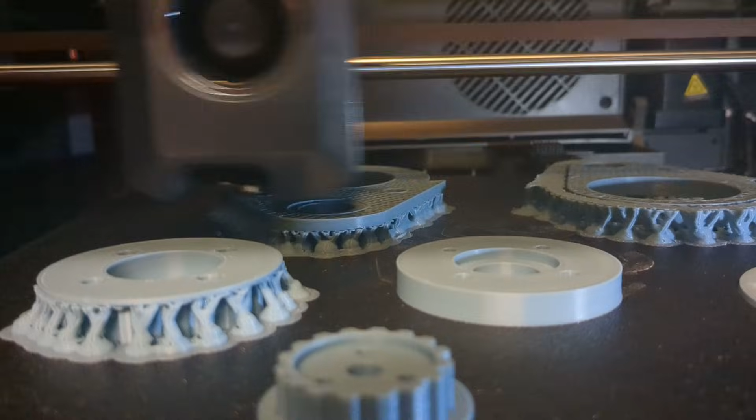Radix qualified for NHRL finals for the first time in the June 2024 qualifier. Combat robotics is a competition won by attention to detail and consistent performance. I knew this. Between June and December, I changed two small issues with my robot.

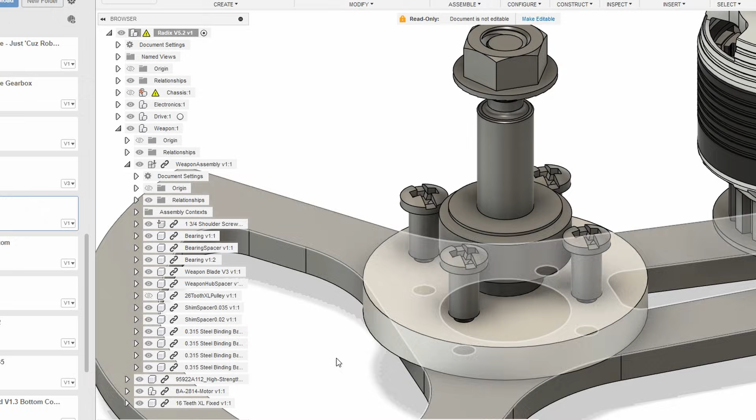First, I added a sharpened blade to my arsenal to deal with wide TPU bots like Fully Defined, Turbo Fiend, and Jelly Baby. Secondly, I added binding barrels to my weapon hub to better hold my weapon screws in. This change was made to prevent my weapon from popping off if I was hit by a big vert while upside down. These minuscule changes meant to address tiny issues were ultimately my downfall.

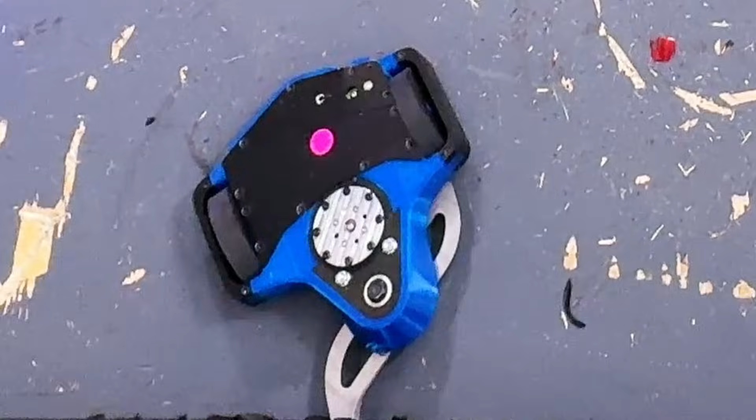For those who haven't seen, I was having a back and forth fight with Turbo Fiend in the round of 16 of finals. After the opening exchange, the fight swung my way. I had disabled one side of their drive and was bullying the mini-bot while Turbo Fiend was trying to recover. With 15 seconds left in the fight, I bounced off of Turbo Fiend, got stuck in the wall, and was counted out.

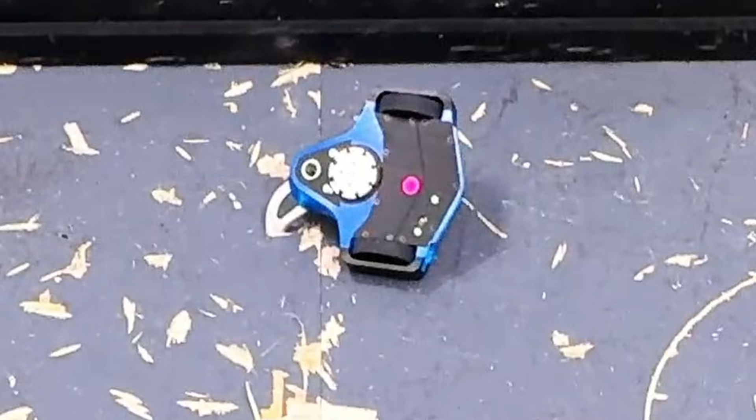Sharpened blade, maybe not such a good idea, or at least I didn't know how to use it properly. After some asking around the Discord, I've heard that I should have been spinning it faster to minimize my bite, so I wouldn't get stuck in walls or in the floor. I'm willing to try it again. However, if I lose finals again the same way, I'm never going to live that down.

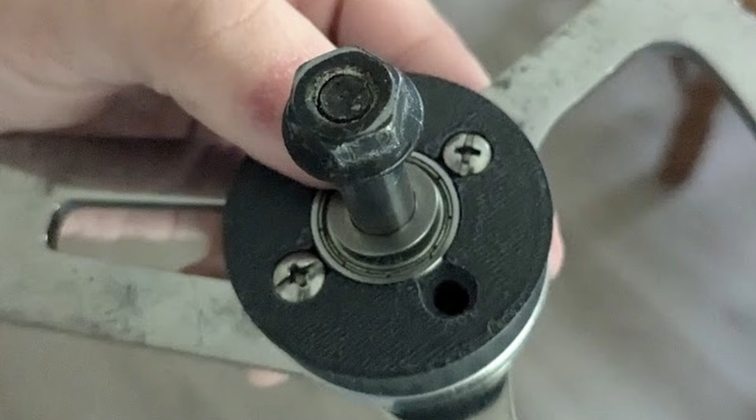Secondly, the binding barrels. To fit them, I had to increase the diameter of the holes in my weapon hub by 1.2 millimeters. I didn't even think about a change that small. Come December 2024, and the pulley cracked in every single fight.

Luckily, Radix's weapon still works with half a pulley. Not to worry, we are still flying half a ship. I never made a finals recap, so consider this it.

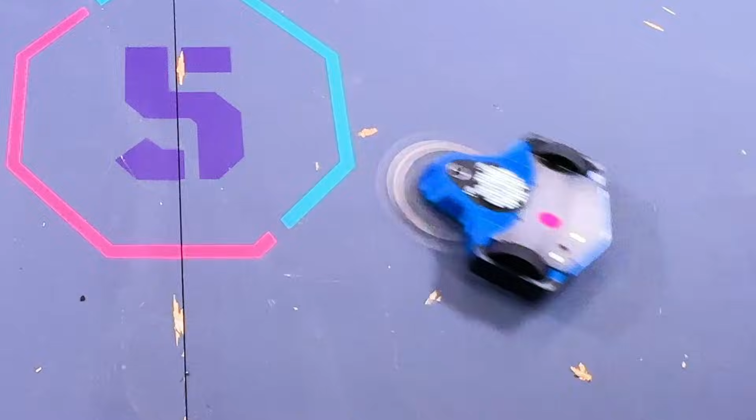The June 2025 competition has just ended, and I've qualified yet again for finals, once again by not even making it to the top 4. In fact, none of the qualifiers from this tournament had to make it to the top 4 to qualify. It was a strange tournament.

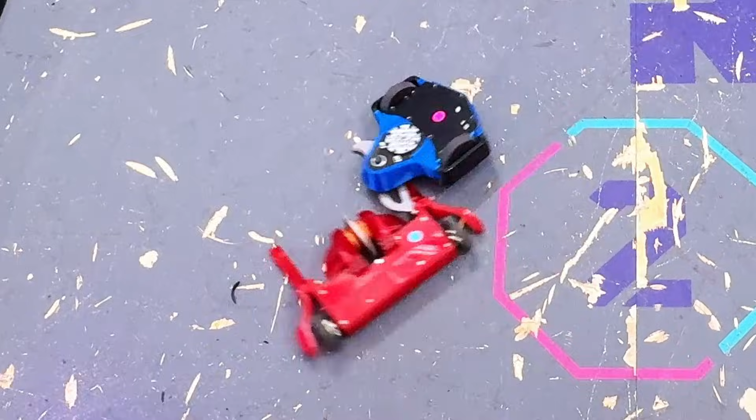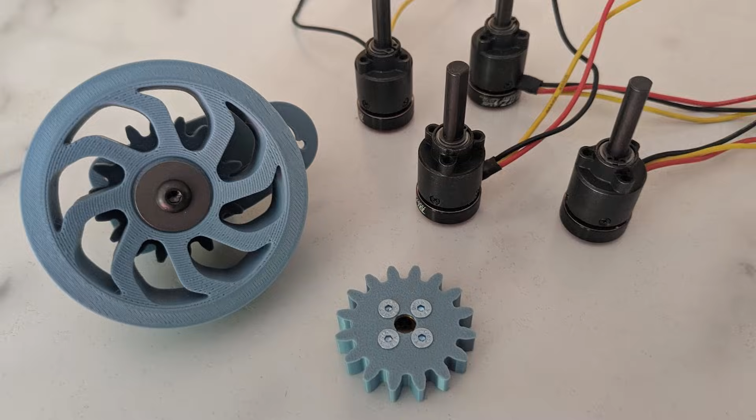Such small changes crippled my robot in finals 1 year ago, so what's my new approach? What will I be doing differently? I'm redesigning the entire robot. Why? Well, I'll answer that near the end of the video.

To understand the answer, we'll need to take a step back and look at past versions of Radix and how they got us here.

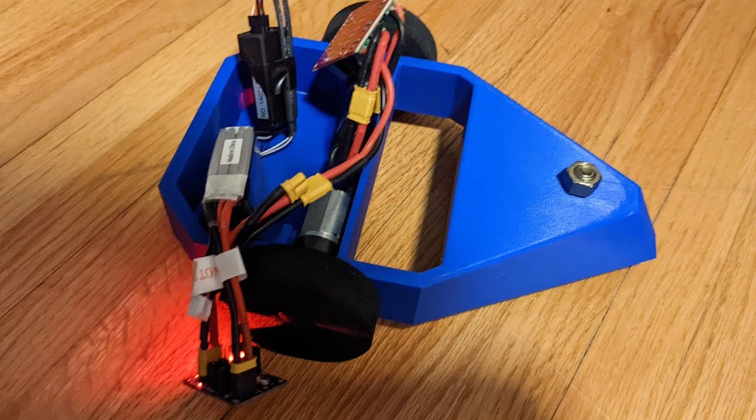And Revolver just looks lost there, Kyle. Yeah, really. The weapon could be down on Radix. Might be, yeah. That was a very loud weapon that we're not really hearing any of right now.

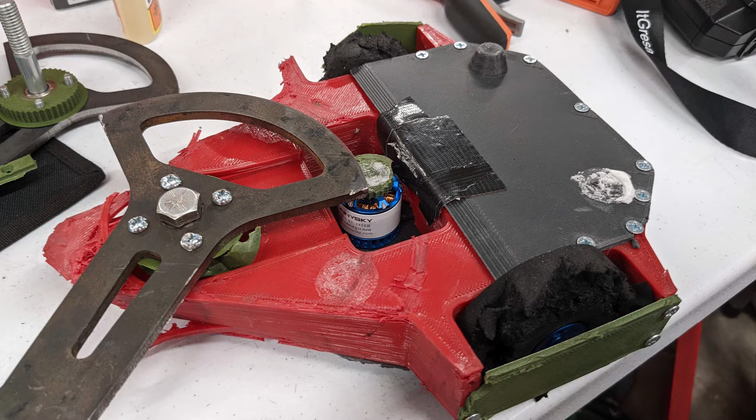The spin-up on Radix sounded scary, but that's because I was using a motor that gave me a theoretical tip speed of 426 miles per hour. However, all the weapon could do was spin. Impacts led to the loss of my belt, the loss of pulleys, a damaged shaft, not to mention that my foam tires made the robot almost impossible to control. It wasn't a bad outing. I went 2-2 in my first tournament with the bot.

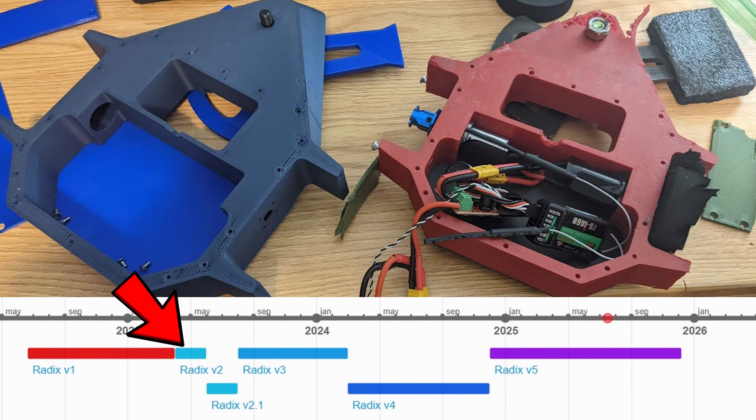Radix version 2 had a much taller frame, with the height being used to separate the weapon from the frame. I also used a stiffer TPU from Amazon to help keep the weapon in place. The actual hardware on the weapon changed too. I switched from a bolt from Lowe's to alloy steel, and from needle roller bearings to ball bearings that you'd find in a skateboard.

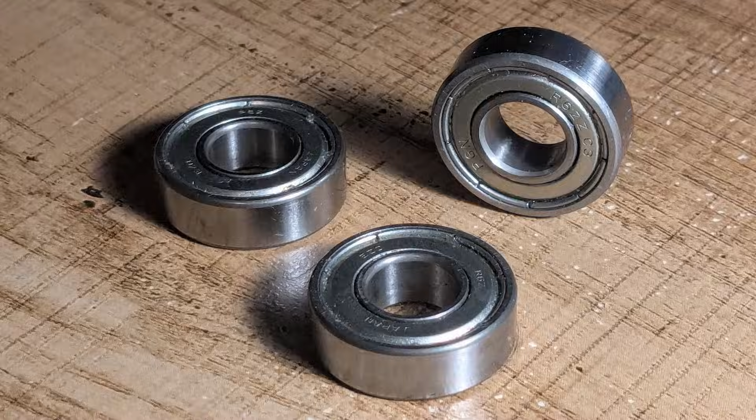This was all accompanied by a larger blade for the bot, now with a 7.5 inch diameter. This bot fought at Extreme STEM in Ohio. Oh, and Radix is blue now.

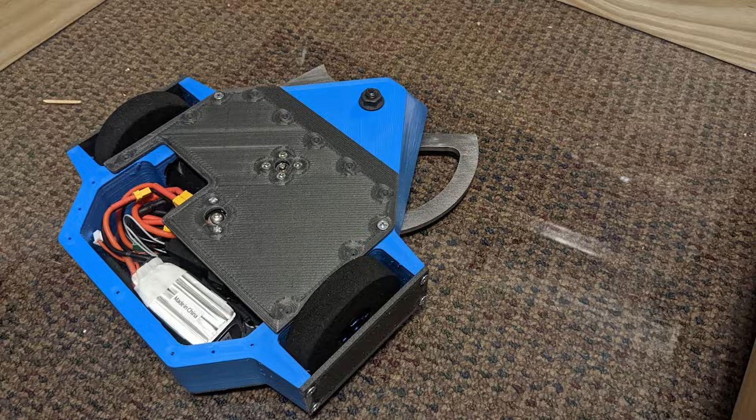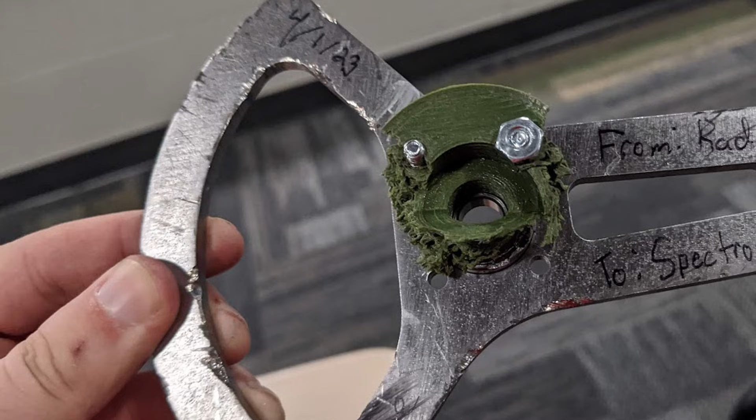That seems important. After getting bodied by Owen's bot Spectroscope twice, I learned a couple new lessons. The weapon still failed, I had just moved the failure point. Now that the weapon stayed mechanically intact, the ESC was blowing up after every couple spin-ups. Even with those limited hits across only 3 fights, the weapon made from SendCutSend AR500 was so badly damaged,

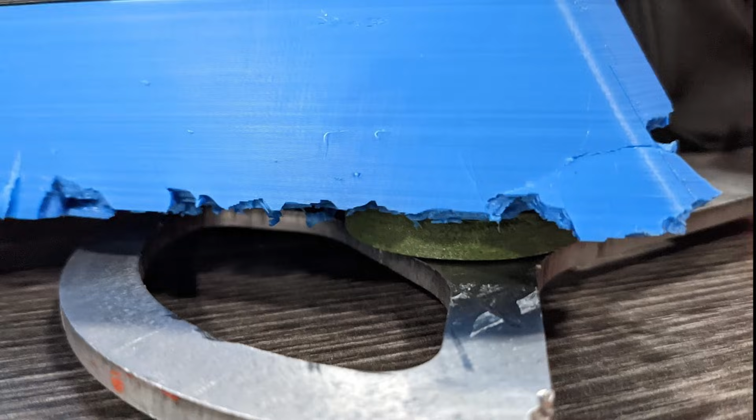I gave it away to Owen as a trophy after the tournament. The new TPU also just wasn't it, it provided about as much protection as a wet paper towel. At Extreme, I went 1-2 and took third.

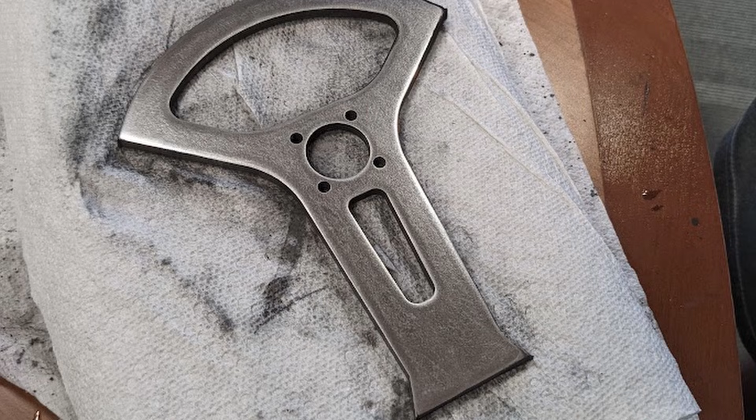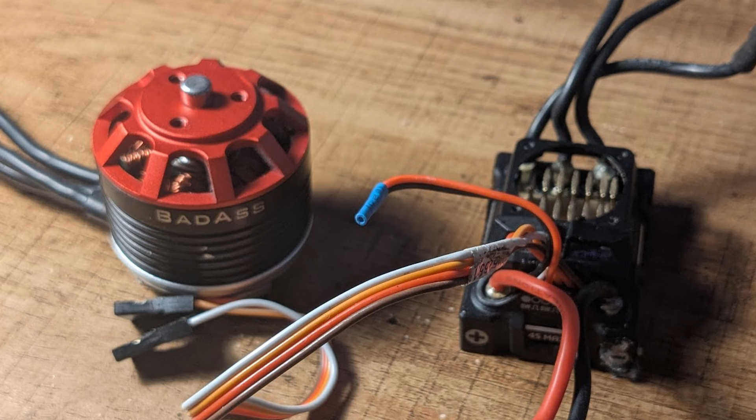Going into the following summer, I showed up at Owen's house and got my new AR600 blades, my mangled blade still hanging on his wall. I ended up settling on a much bigger weapon motor, the Badass 2814, powered by the Castle Creations Micro Mamba X2. To improve my control, I coated the wheels with rubber cement and latex.

Thanks, Calvin. What followed was the worst performance for Radix to date.

To give a short list of things that went wrong: the heavier motor warped the 3D printed top plate, being invertible isn't a strength if the other robot is short, I hurt Bart's face, and the weapon could still hit the pulley. With the electronic issues fixed, the failure point moved back to my pulleys, where it was originally. The tournament result: 1-2.

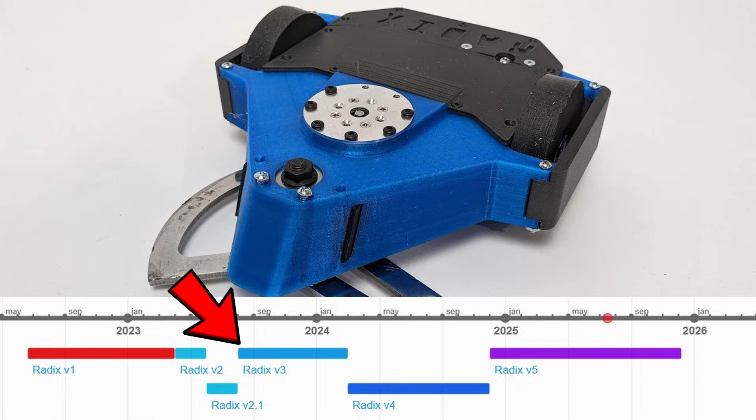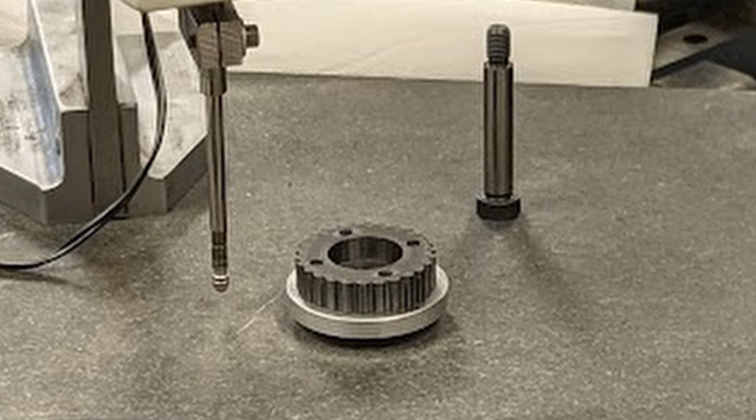This year, there were 2 summer NHRLs, which meant I could upgrade the bot and return to fight before the semester started. Carbon fiber plates were added to stiffen the front end of the robot. The first machined parts were introduced to Radix as well: an aluminum plate to hold the weapon motor and an aluminum brace to mount the weapon. Radix version 3 was born.

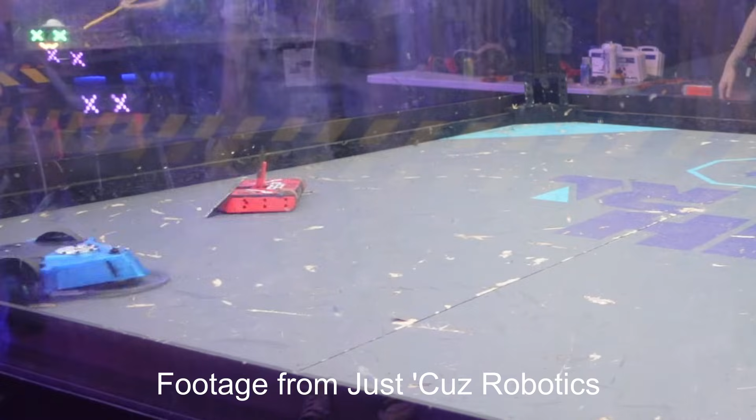My August tournament was a lot of fun. I got to fight NHRL legends Evan Arias with Shred It Bro and Seth Schaefer with SSP, who printed the first Radix frame a year prior. However, my performance wasn't much better. I went 2-2. That brings us to 6-8 total if you're keeping track.

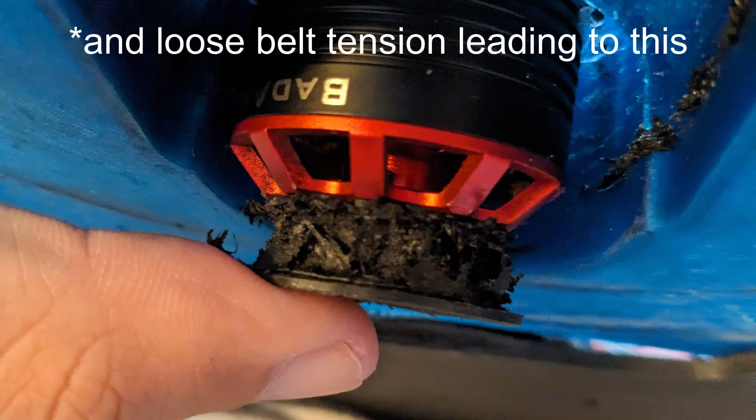The culprit? My flexing frame once again. I also had issues with my drive cutting out randomly in the Shred It Bro and SSP fight.

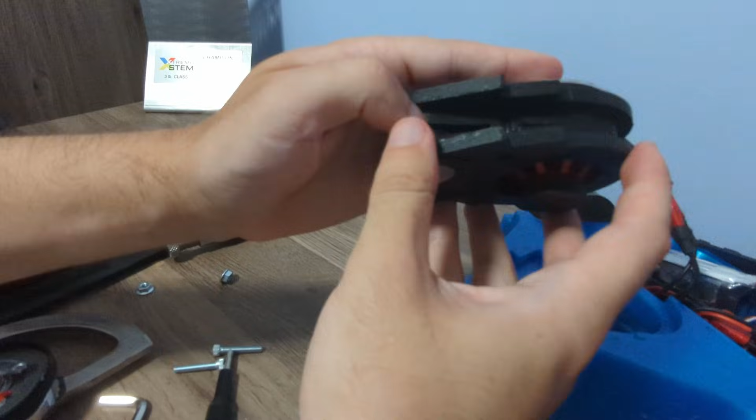Determined to fix the frame flexing issue, I printed a glass-filled nylon part meant to clamp into my frame, which would support both the weapon and weapon motor. When the weapon flexed, the motor would be forced to flex with it, moving out of the way on big hits. I have an entire video on just this part if you're interested.

I also replaced my drive motors with geckos from Seth's store, Team Just Cuz Robotics. This is the second time I've purchased parts from someone I've lost to, immediately after losing to them too.

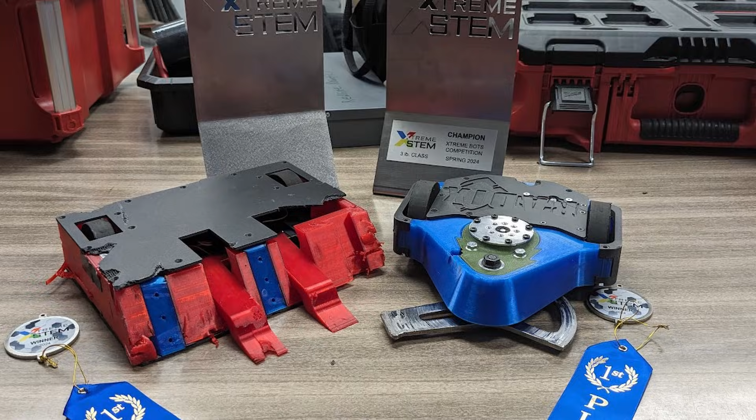Xtreme this year told a different story, not of the old, unreliable Radix, but of a new, durable one. I went 5-0, winning this tournament.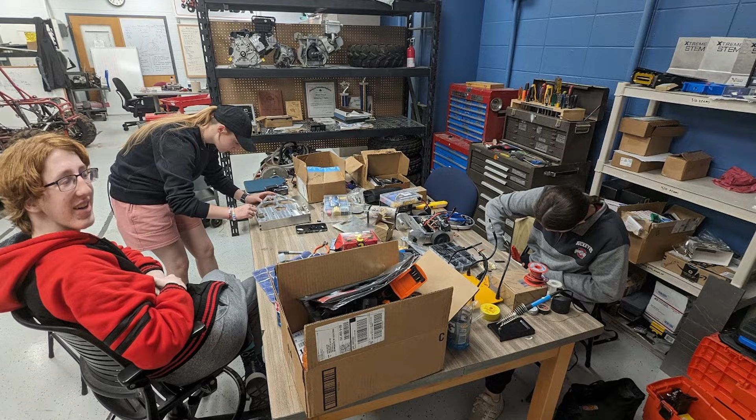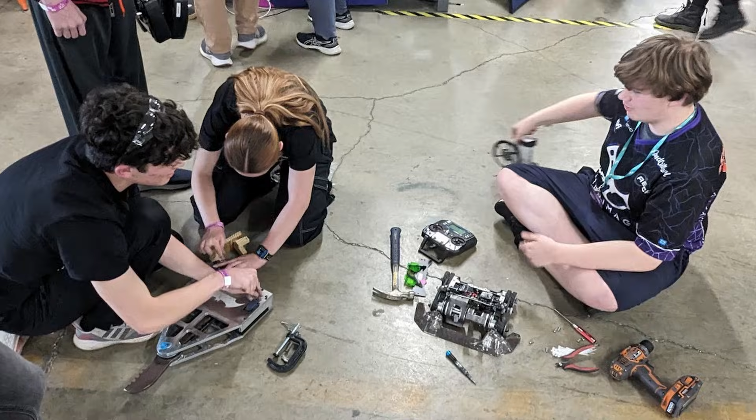I was hyped for NHRL, having finally a half-decent bot to show Radix version 4 could deliver a punch and take one too. I made my way over to Norwalk from Ohio that spring, leading the Combat Robotics group from the University of Dayton. I was competing with Radix and the 12-pound drum spinner Radon, which ended up getting maximized. The team also brought Gotham, a 12-pound horizontal, and Raise the Roof, a 3-pound dual lifter.

Radix's April 2024 performance could be labeled as alright. I showed the devastating power of my weapon against Ace and Fifan, but my lack of skill as a driver cost me against Half-Life. To be fair, that bot is a nightmare for horizontal spinners.

I decided to go back in June to give it one more shot. I spent the summer practicing my driving, but made no changes to the bot. Oh, and I also used all that time to write up a strategy document on every single 3-pound robot that registered for the tournament.

I had a little bit too much time on my hands. This was the money tournament.

I made it to the quarterfinals and qualified for finals through what I can only describe as an act of God. Normally only the top 4 qualify, but if a top 4 bot has already qualified, the next highest rank gets it. There was an insane qualification chain.

I was eliminated by Jelly Baby in much the same way I lost to Half-Life, another close judge's decision. This time my weapon motor did die at the end, but it was because I pushed it too hard and used it to escape pins.

I was in finals. Any changes I made now would be minor, and I just wanted to close some gaps in the robot's performance. For finals, I debuted version 5.

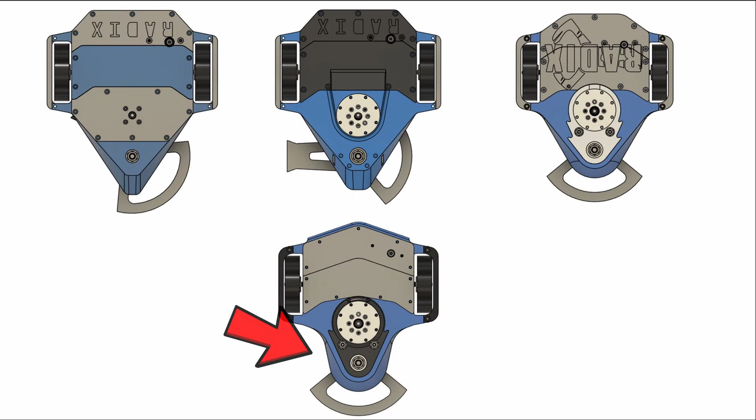I gave it a new name mostly because of its distinct profile, featuring a skinnier nose than past versions of the bot. I also made the changes mentioned in the introduction of this video, the binding barrels and the sharp blade, which both ended up not being good changes.

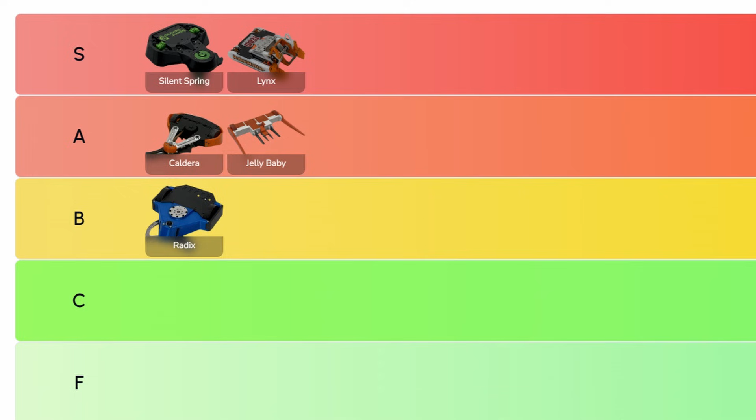I went 2-1 at finals, but one of those wins was a forfeit from Clyde. I was happy, but Radix still feels B tier, with A tier bots being tournament winners and S tier bots being Golden Brett contenders. I wanted to push into the next tier, but still had an undamaged Radix from December.

I signed up with the exact same robot for June 2025 and got another deep run going. If the new Radix is anything, it's consistent.

I went out in the same round I did a year prior, losing to Caldera in what is now my favorite match of all time. It was back and forth until it wasn't. My inferior bot simply gave out against the number 1 rank, and everything failed at once.

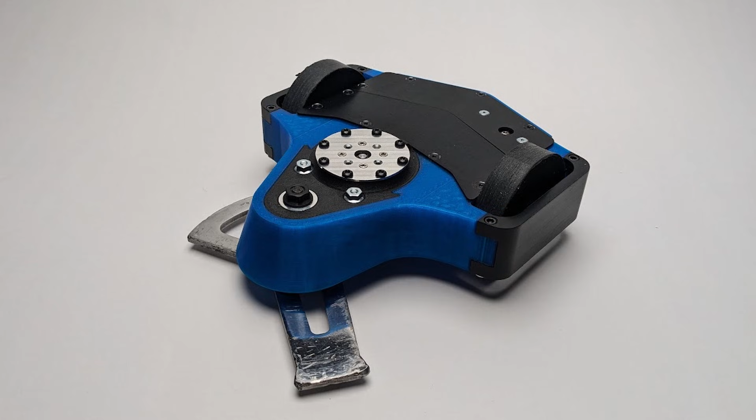The bot was totaled, and it was also my last copy of that version of Radix. I had two options. Option 1, costing about $500, rebuild Radix for finals.

Option 2, carry out the largest redesign ever on Radix, and build that version. This would cost about $1,500. I chose option 2, and it wasn't even that hard a decision.

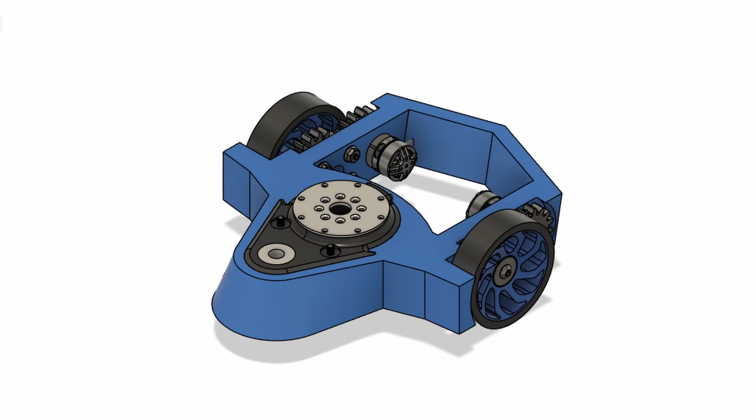Here's why. I'm stealing this analogy from a YouTuber named Technoblade. There was a math test called the American Math Contest, given to students in the country with a large scholarship award for the best. It was one of those tests where you'd get points for getting questions right, nothing for leaving blanks, but you'd lose points for getting questions wrong.

It was a setup meant to discourage guessing because on average you'd lose points. The strategy he suggests? Guess. Guess on everything. The best scores are the only ones who get a scholarship anyway. You need an amazing score, not just an average one. Even if you need to guess on everything to give yourself the slimmest chance of finishing at the top, do it. You'll probably do worse, but who cares? There's no scholarship for average.

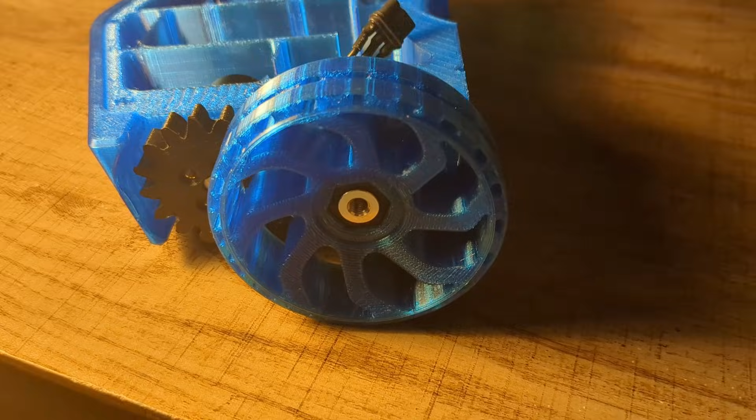The next version of Radix, called Radix NXT, uses light and powerful brushless motors with indirect gear drive. The bot is shorter, more compact, and easier to control. If the previous versions of Radix were meant to tank hits, this one's meant to kill.

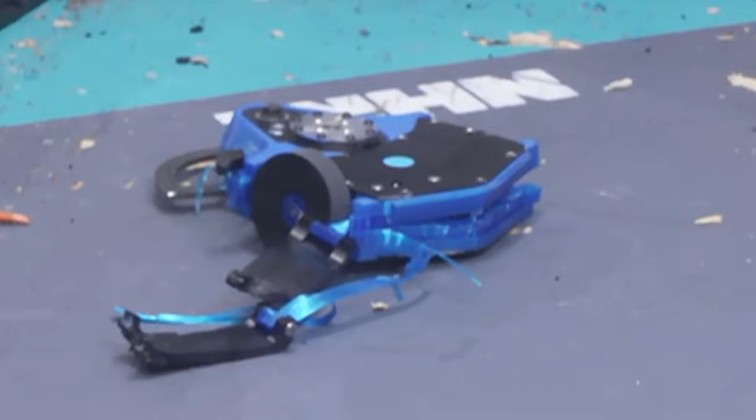I'm starting grad school in the fall and likely won't have time or money to fight this version of the bot before December. Yes, with so many changes and that little testing, Radix NXT will probably do worse than Radix version 5. A light explosion for your evening pleasure.

However, I decided I'm not coming to finals to do well. I'm coming to win.